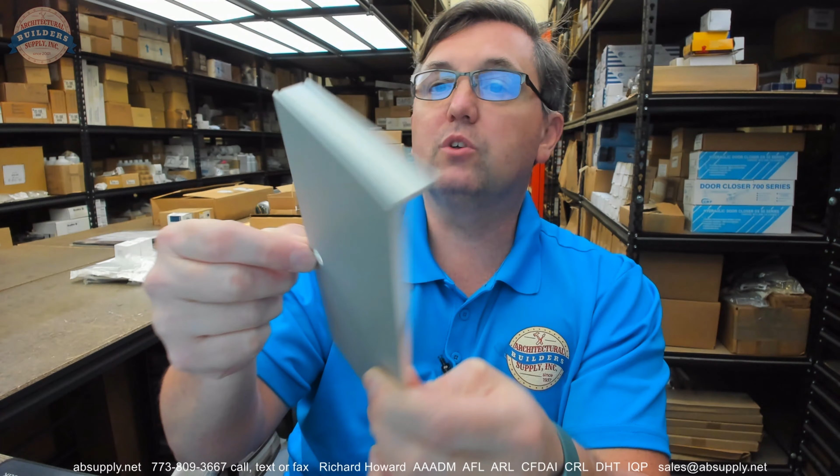So it's basically a piece of extruded aluminum that's been machined, and that's all it is. And this is for a 3-foot door, and that's going to be in relation to the width of the plate itself. Okay, let's take some basic dimensional properties.

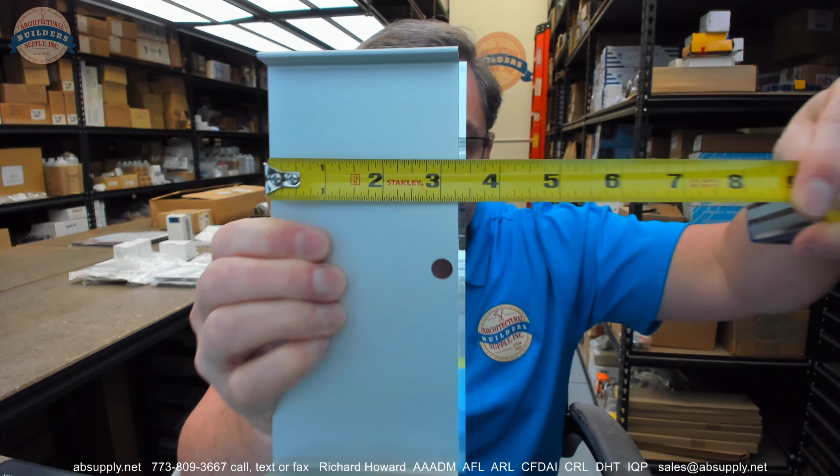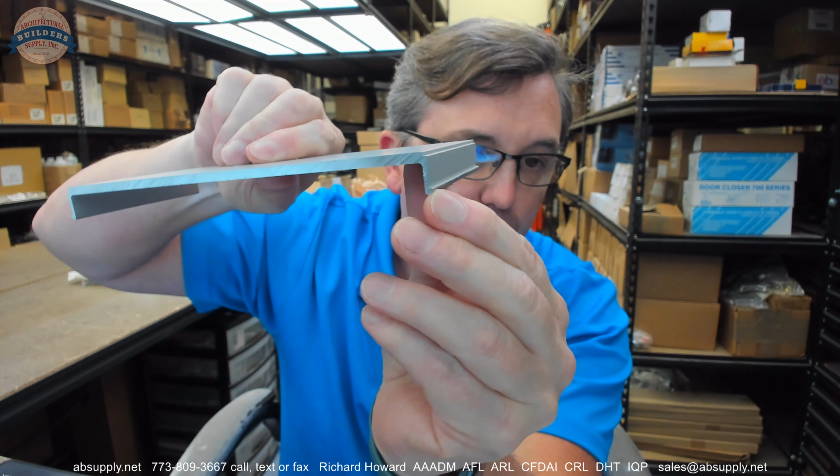Overall height, measured from the back, about 7 1/4. Its overall width is about 3 7/16. Its overall depth, you can see, is right at about 5/8 of an inch. And there's an image down below that'll show you this feature of what you're going to do to slide it into the Paneline, into the chassis.

So let's switch now to the screen view where we can take a look at some supporting documentation. Before we do that, let me put a caliper around the thickness of this aluminum extrusion. It's got to be 200 thousandths. Sorry, 155, so 0.155. 0.155, about 5/32. Okay, 0.155. Let's switch to the screen view and take a look.

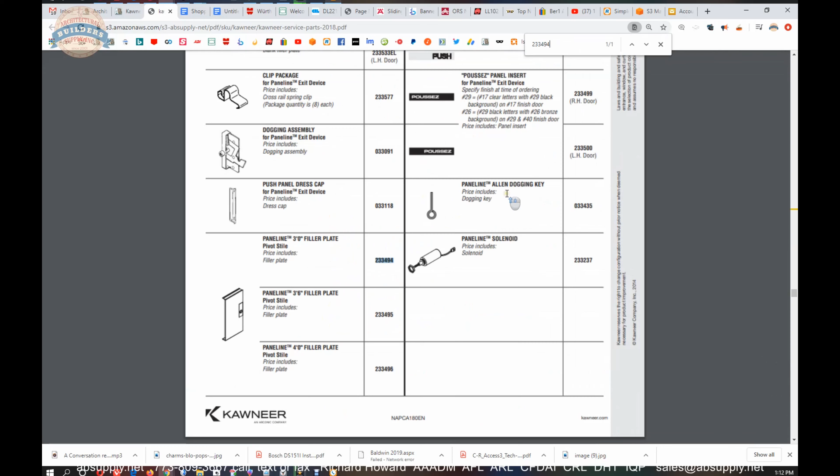Okay, so this is the item that we are looking at right here. Not much to see here, but what I wanted to show you was the link to the service parts catalog. Let's copy that part number and then fire up that PDF document. There are different versions of this in terms of the year of publication, and I'll show you where we keep the other ones that we have for your review. As I search for the 233494, I'm immediately going to come to the page where I find it.

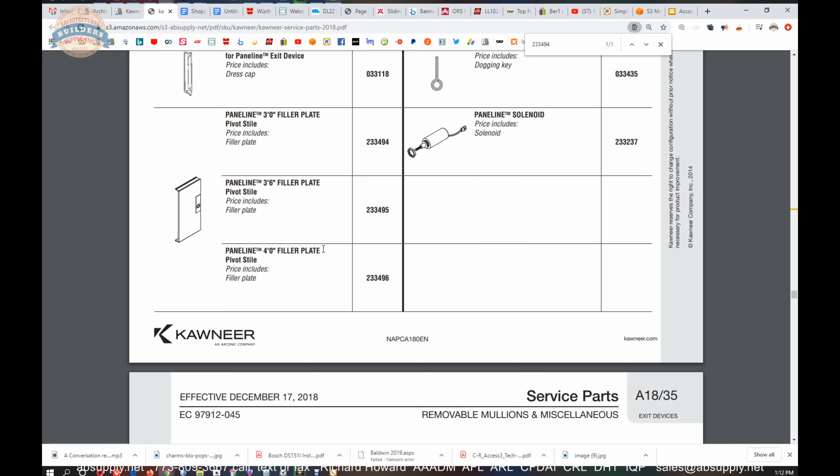Now, I had mentioned the 3-foot pertains to the width of the filler plate. It would only make sense that when you have a 3/6 or a 4/0, you're going to have more aluminum, so that's where you're going to get the other pieces. Now, having said that, you could certainly cut this, but I would earnestly discourage you from cutting it, only because the factory gets a very clean cut. I imagine that they are cutting this on a liquid-cooled radial bandsaw, that sort of gizmo. Now, I said we'd talk about the Paneline, and here's the chassis.

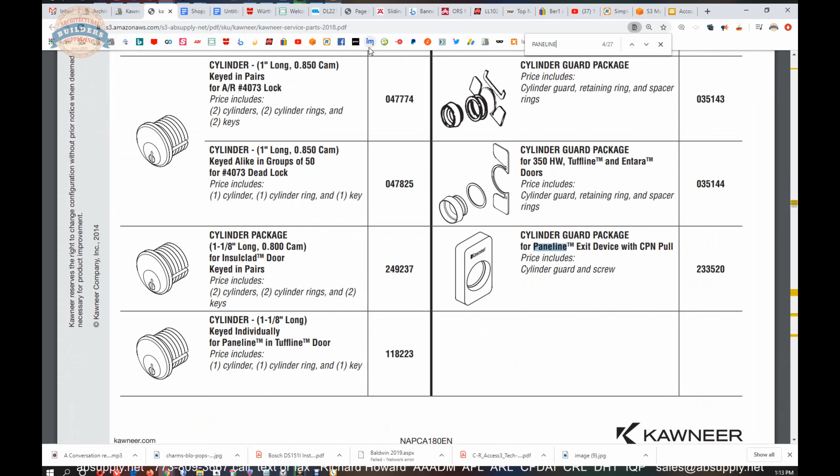Let's search the entire document for Paneline, and we'll find lots of instances of it just in the service manual part, not even going into any sort of other marketing documentation that they may have.

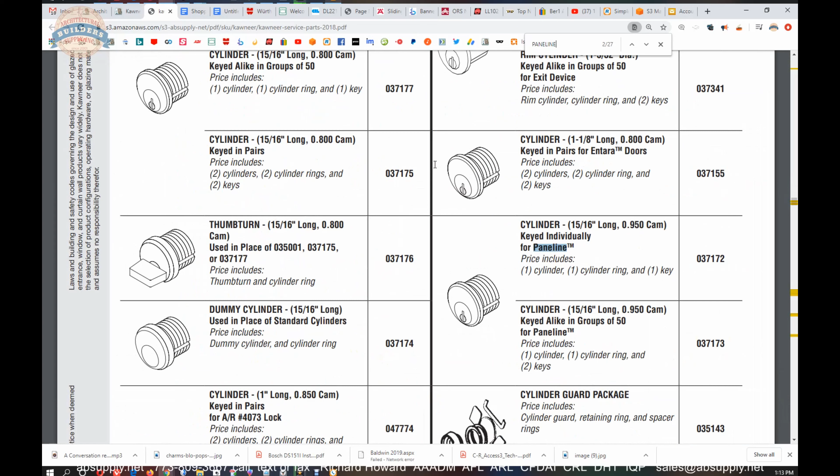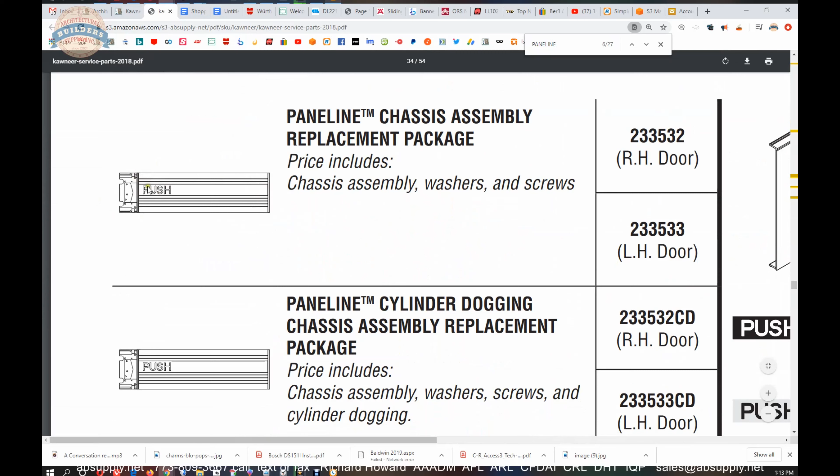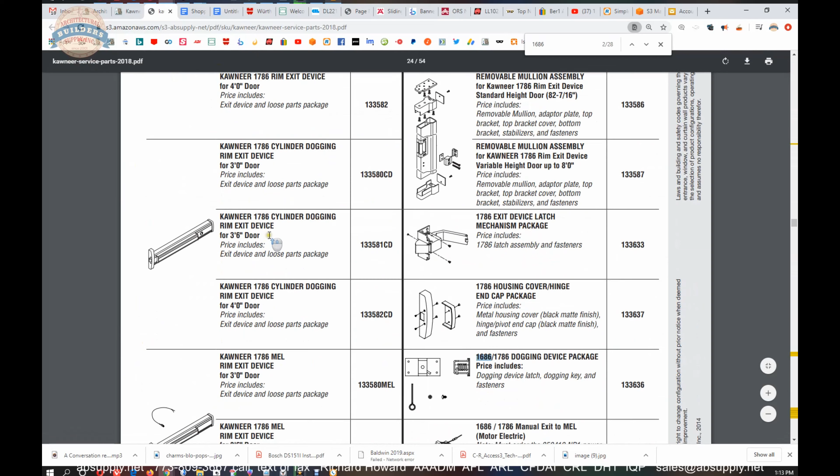So not a great picture, but the fact of the matter is, if you've got this very large paddle that's literally integrated into the mid-rail of the door, you've got a Paneline. The other two devices I had mentioned are the 1686 and the 1786. The 1686 is their concealed vertical rod device. It's going to look like that. No latch here because it's concealed vertical rod. Then they have their 1786, which will look the same from a distance, but it's a rim device. Okay, so it'll have a Pullman latch out here.

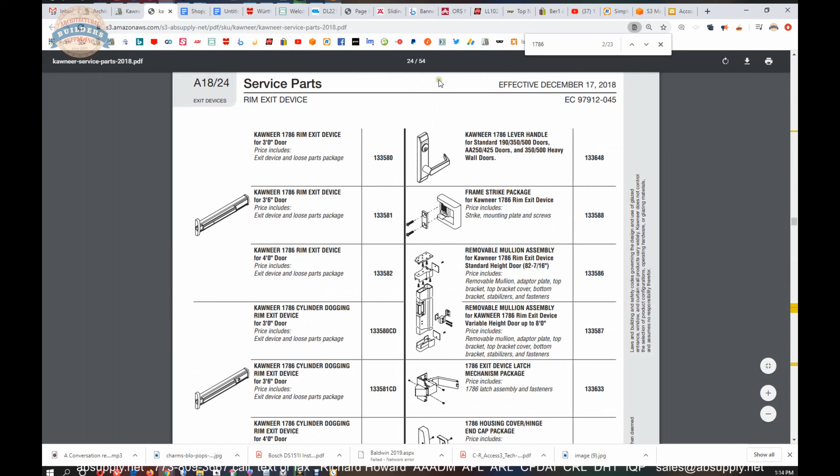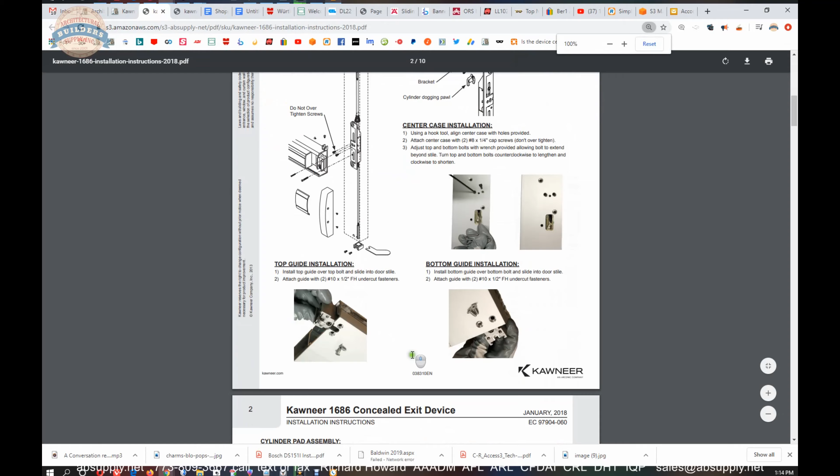So this document is 50 plus pages of service parts. Very handy, very useful. This is the document that we refer to all the time. If it's not in here, it may not exist, but if it's not in here, it very likely could exist. And what I mean by that is the factory will very often have a document that might look like the 1686 installation instructions, where they literally have these parts referred to, but these parts don't show up anywhere in a parts manual. The end cap you can get. The bracket to mount the end cap, that's not published anywhere.

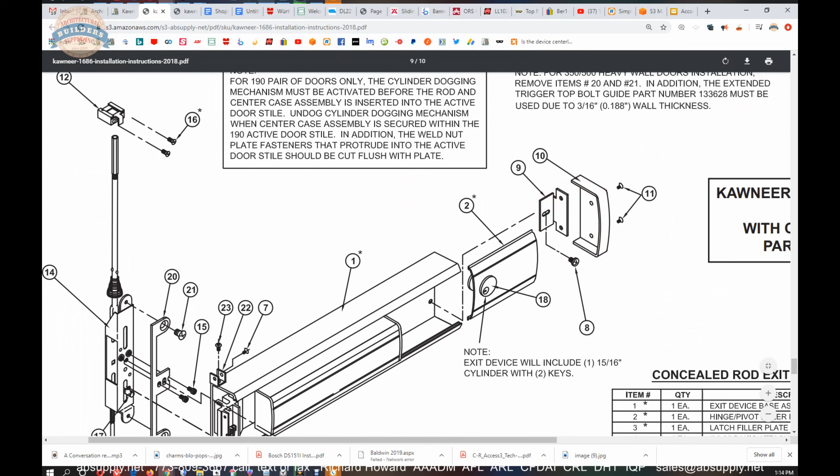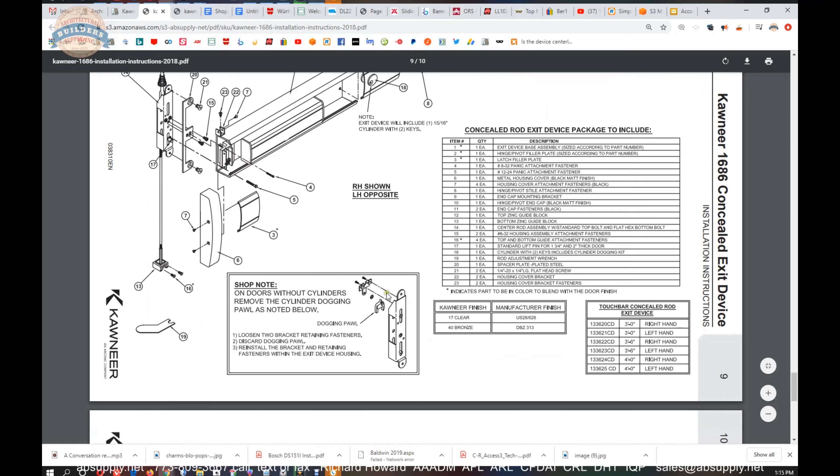So some of these items are available, some are not. I just had a client who wanted to purchase part 3 and part 2, and they were not available as standalone products. So if you find something that there is no part for, reach out to us. We'll ask the factory if we can get our hands on it. But there are times when they're just not available separately.

Now, the link here to the manufacturer's page on any item that you're on, we were just on our filler plate. Link here to the manufacturer's page. That's going to allow us to take a look at all of the Kawneer items that we have, as well as a link to the manufacturer's website, their architectural hardware catalog, but over here, service parts catalog. So I save all of the documents we have. You might get a part number that's odd, that's unusual, and it hasn't existed for a long time. Access to older documents is really handy so that you can figure out what it was and try to figure out what you can use to replace something that's been discontinued.

Let's wrap up this video on camera. Now, in conclusion, Kawneer is a very common aluminum storefront manufacturer of material. They work very well with the commercial hollow metal and wood door industry, distributors like ourselves. And I have been very successfully able to not only sell their material to people who buy it, but really where we come in is replacement parts. And I feel that we do a really good job at it.

I think the role of providing replacement parts allows the client to continue to get useful operation out of the significant investment in code-mandated hardware. And it's no good to have a significant investment in exit devices when they don't work or they're not set up properly. So reach out to us for your needs on parts.